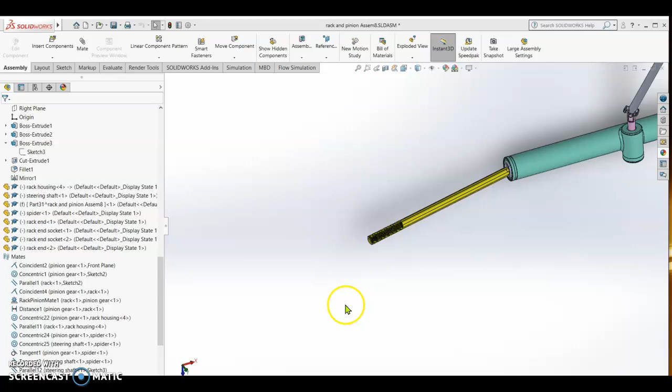Now we are going to design a jam nut for our rack end. So we have to determine the diameter of this threaded part of our rack end.

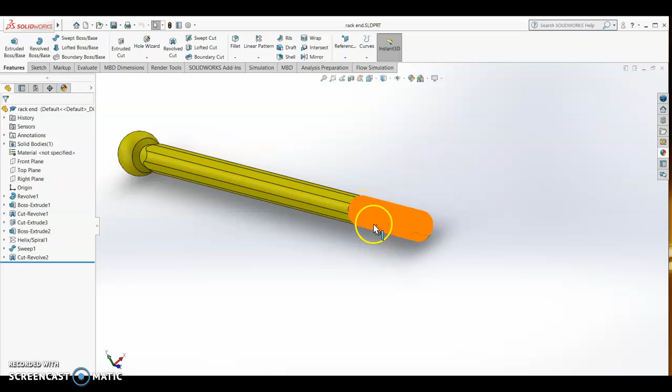So to do this, we open the part, and then we try to see the diameter of this part. It should be this extruded boss. So we click, and we can see that the diameter is 10 mm.

So we are going to make a jam nut for this one. So we go open part.

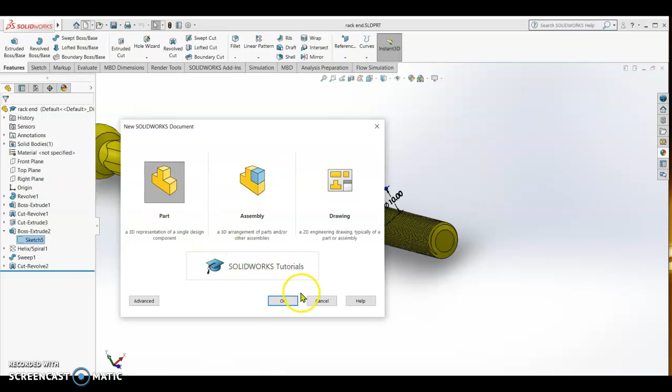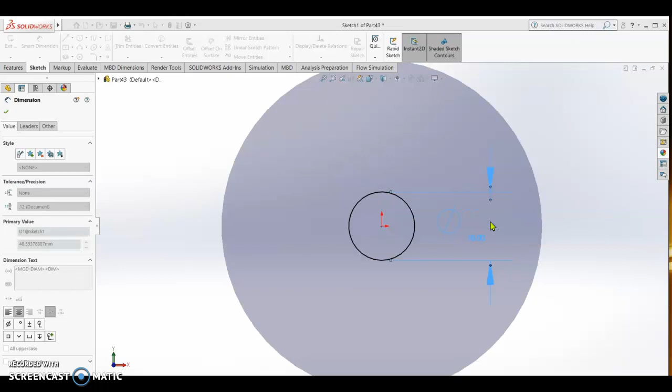So on the front plane, we sketch a circle with a dimension of 10 mm, alright, and then we draw

a hexagon with a dimension of 14, meaning this jam nut could be used with a 14 mm spanner.

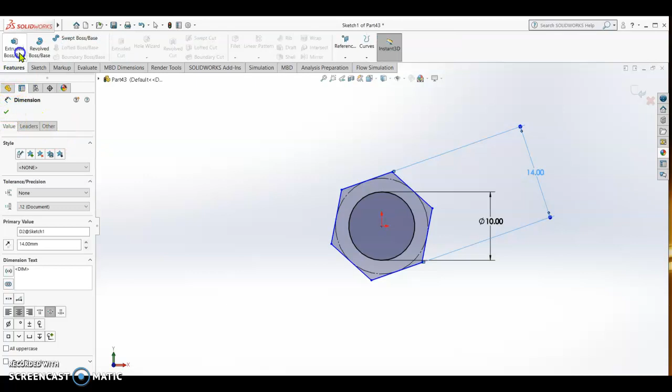Once done, we go to features and extrude by 15 mm, check. So this is now our jam nut.

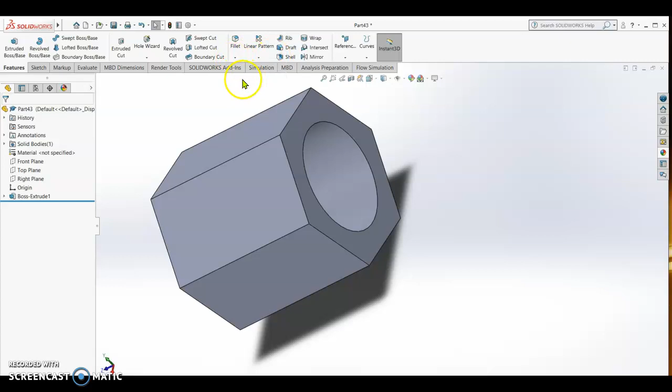So we can make a thread on this one, but before we do that, I want to make a chamfer on this edge, and also on this edge. I want a chamfer of 1 mm, or I change it to 1.5,

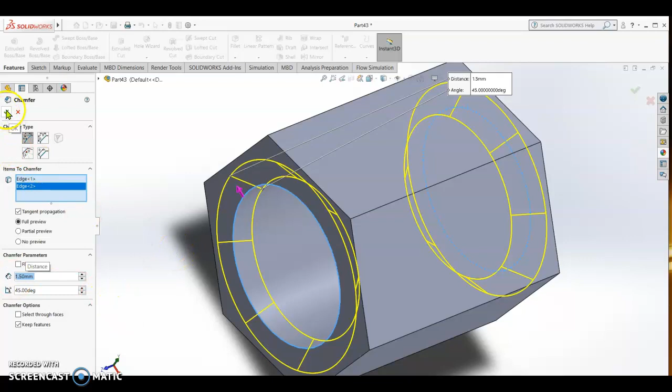a bit deep inside, check. After that, I sketch on this space, and then draw a circle.

So the circle should also use smart dimension. I make this one 11 mm.

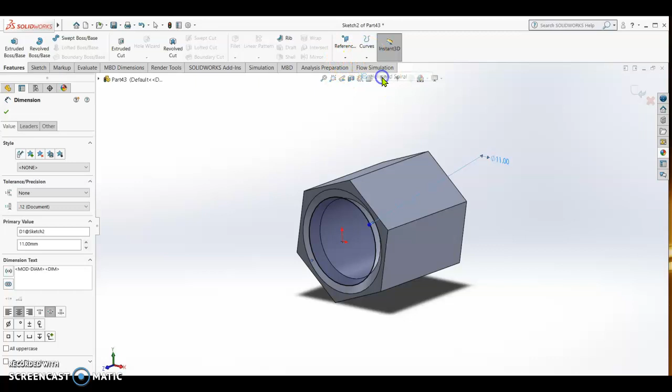So with the 11 mm, I go to features, and then we go to helix. We are going to put this one 15, because one revolution or one pitch is 1 mm, so it will go through, check.

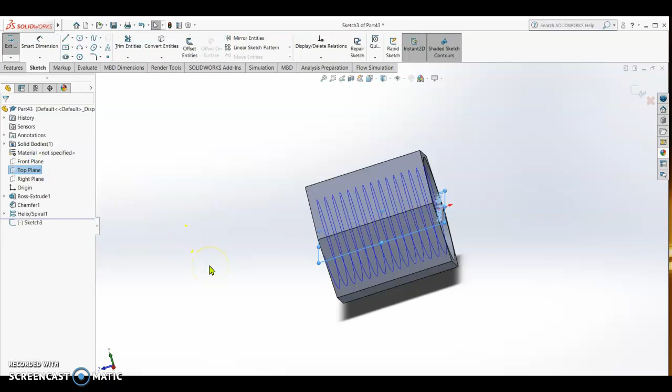So we are going to draw on the top plane for the profile of the thread. We are going to cut it, normal to. So I'm going to sketch here.

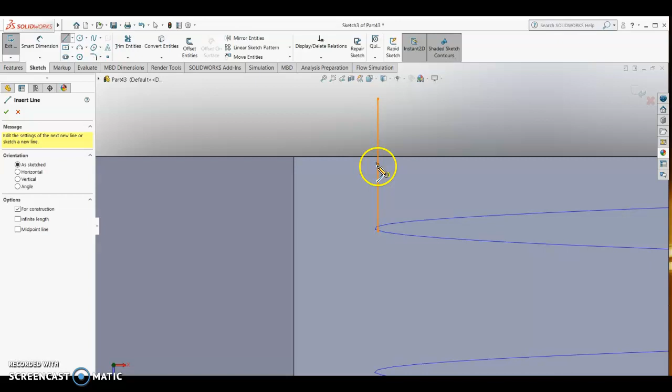I'm going to sketch a line so it should touch my helix, escape, and then I'm going to draw a center line exactly on the middle of the line. That is the middle. I'm going to make it on this direction, and then we draw the profile of the thread.

Now we are going to mirror this line and this line. Mirror above, using the center line, and then check.

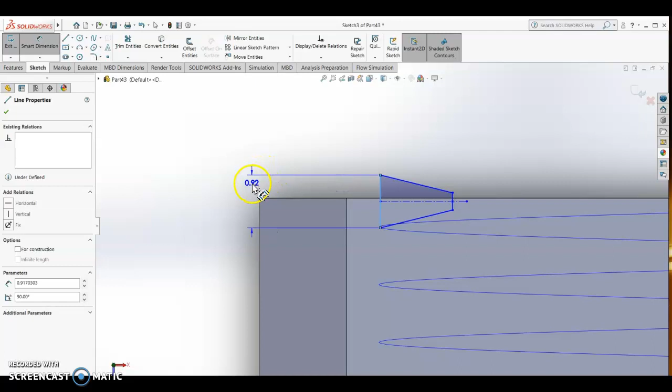Now we put the dimension, so this should be 0.8 mm, and this should be 0.2 mm, and the height should be 1.1 mm, because if I put 1 I am afraid it will not cut all the way, so I put 1.1 mm.

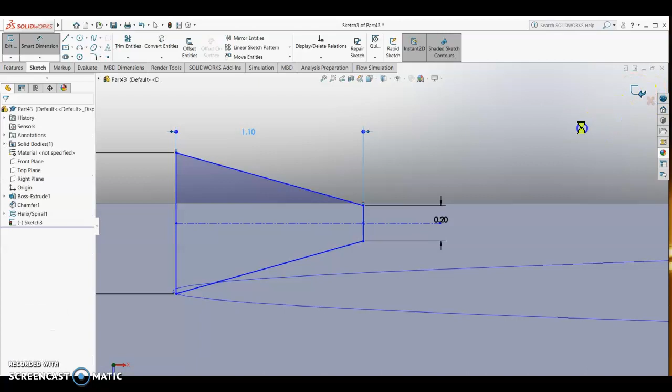We close the sketch, and then go to features, sweep cut. So we select this helix as the path, and then let's see if it cuts all.

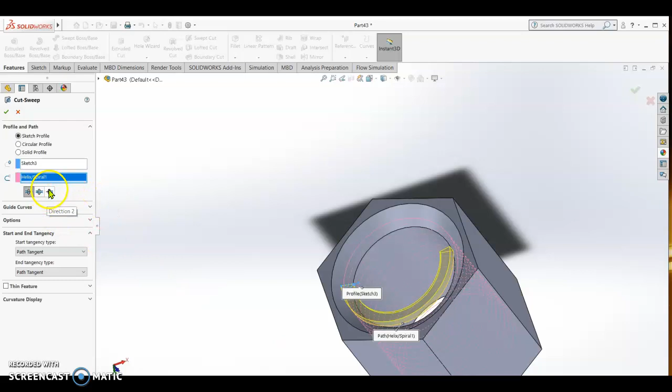No, so therefore we change this direction. Once cut, we can hide the helix so that we can see. Now this is our threaded part of the nut.

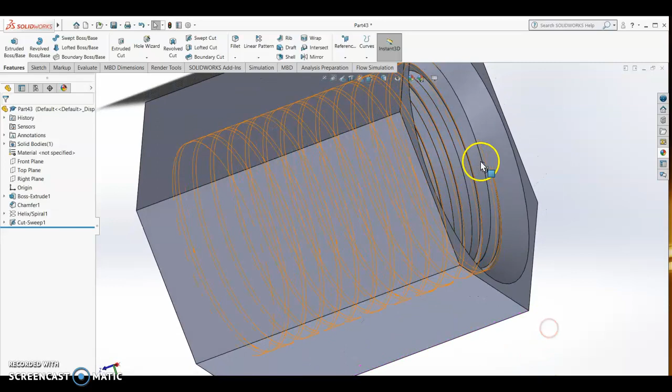Now if you notice, this is a bit big, the chamfer, so we can edit this one and make it only 1 mm, and then check. So now it's better.

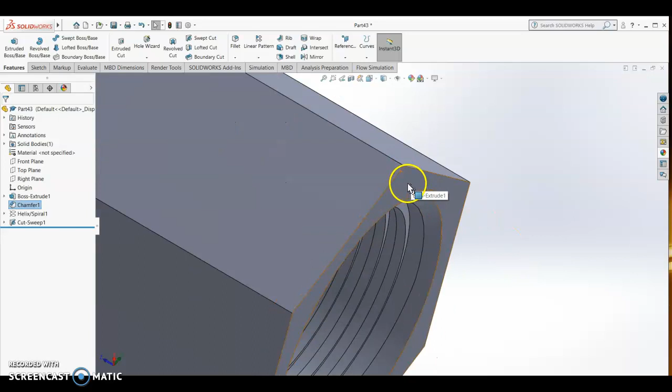So this is now our nut, so we can make a chamfer to make it nice. Fillet, or better we select this edge. So we make this one 0.5 only, enter.

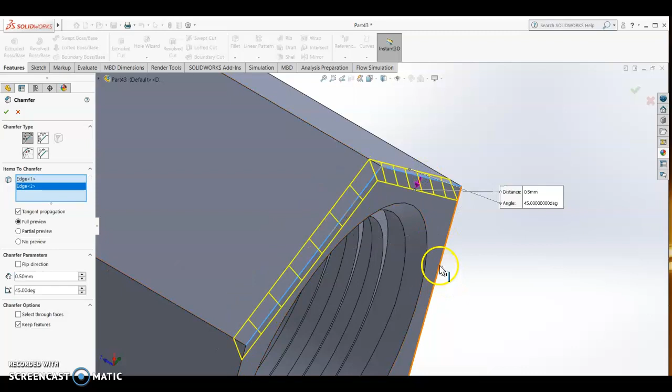So we select all the edges. Select this edge. Oh, we don't select the base, the edge only. So similarly here,

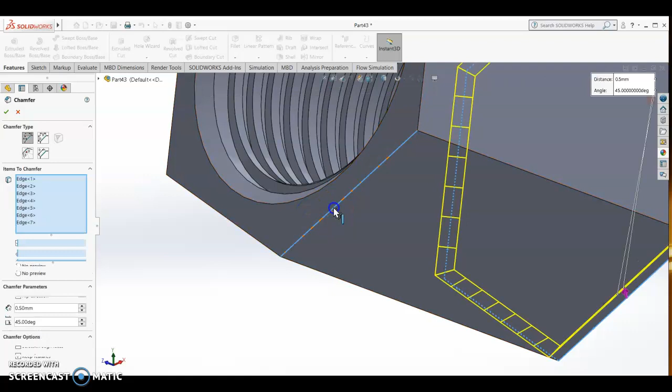actually we can select this. Oh, you cannot, so we select only the edge. Alright, the edge. Check.

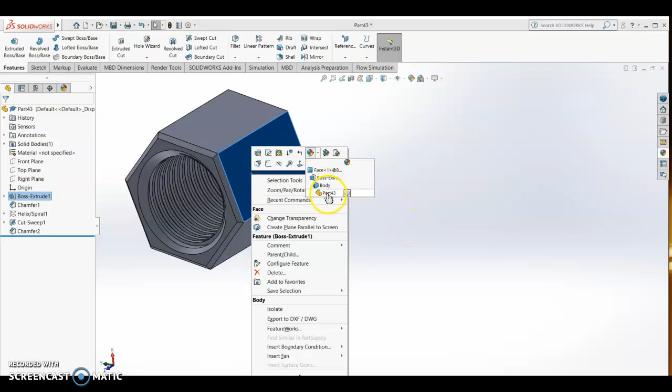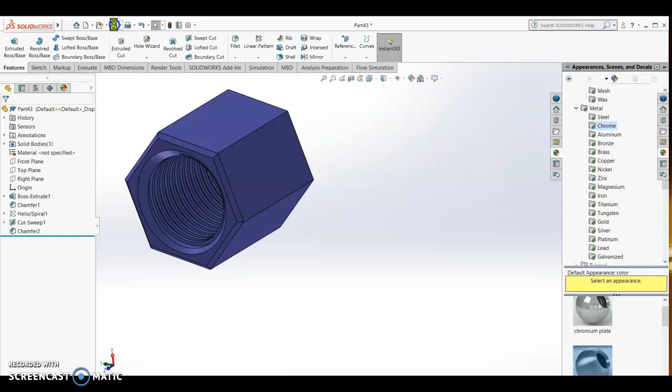So now our nut is done. We can change the material of this part, so we make it metal, chrome. So we select this area, then maybe color it light blue. Check, and then we save as nut.

Save. So that's it for the design of the nut.